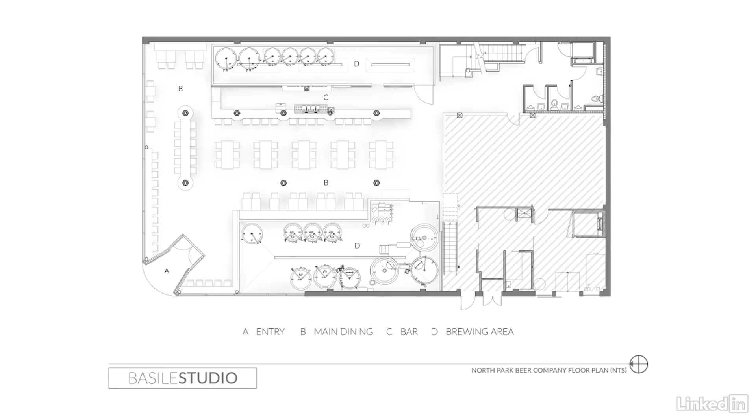Restaurants are extremely complicated because no matter what size they are, they all need the exact same elements. Our whole motto is basically we customize and build as much as we can, and that will give you timeless.

I'm a fourth generation contractor. The need and want to build was always inherent in me. One day I was in a cafe in La Jolla, sitting on some chairs made out of rebar, and I thought it was the coolest thing. So I said, I can get this material for free. I just started making rebar furniture for just about everybody, for every occasion.

I started putting it into stores. Every time I put furniture in, almost 2 or 3 days later, it was gone. When I went in one day to look at the furniture I put in, I noticed how much they'd marked it up. I was immediately like, well, wait a minute. I decided to open my own gallery furniture store. And that's kind of where it started.

People started asking me to do custom work, so I became kind of a fabricator for a lot of interior designers and architects. It got to a point where I got known for that, so designers would just say, if you need something, just cold call Paul and he'll design and build the whole thing for you.

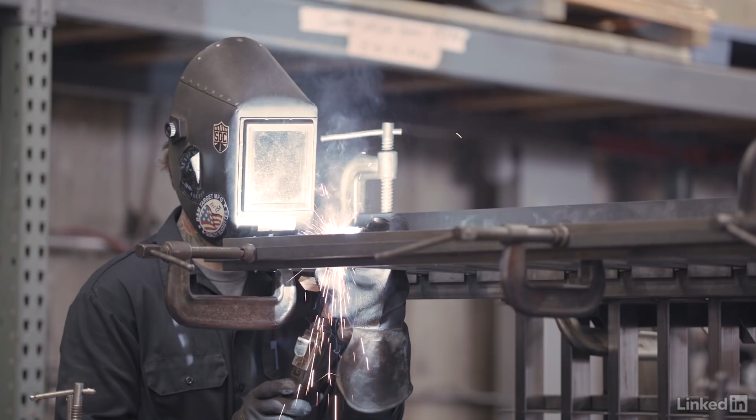BASILE Studio is kind of an incubator for rapid manufacturing or prototyping. My thoughts on how to get something done come from a fabricator's perspective. I just scrapped the traditional way of doing things and basically said, here's the quickest way we can get from A to Z.

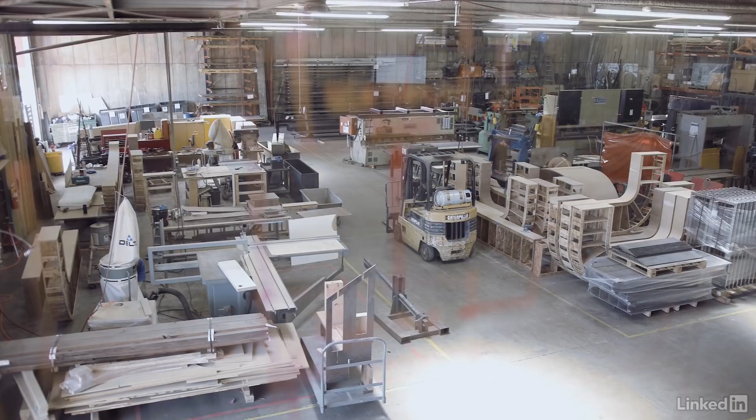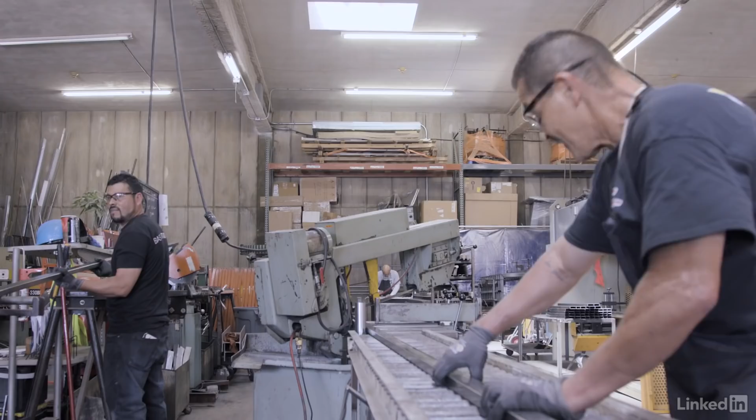Our design studio is integrated into this shop, so what you're seeing above me is a design studio. Typically, you have a designer who comes up with an idea, then sends that idea out to a bunch of different people. Well, we do all of them. We not only do what's traditional in the design role, which is just drawing and coordination, we're involved in fabrication and construction.

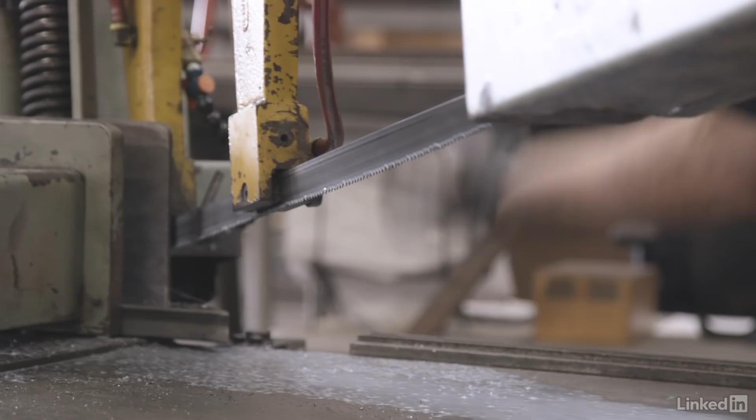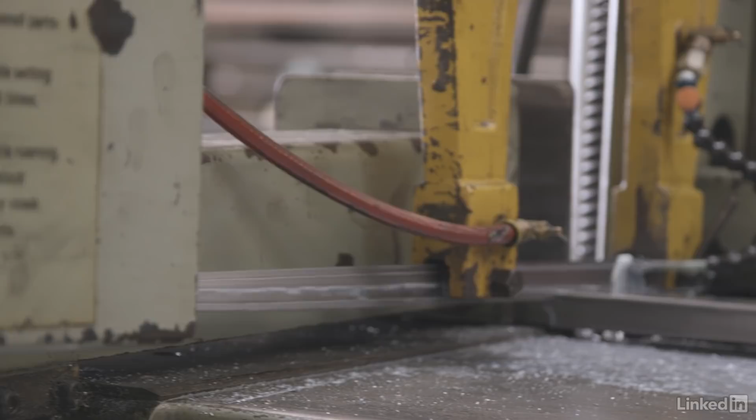Typically, you design something and send it out, and then you don't have to think about it again until it's installed, and you just deal with how it's going to be. The great thing here is now we'll design something and catch the errors right away, or see how it can be improved. It cuts back on all the miscommunicating, and it puts it all together so that anything you can think of can happen, and it can happen fast.

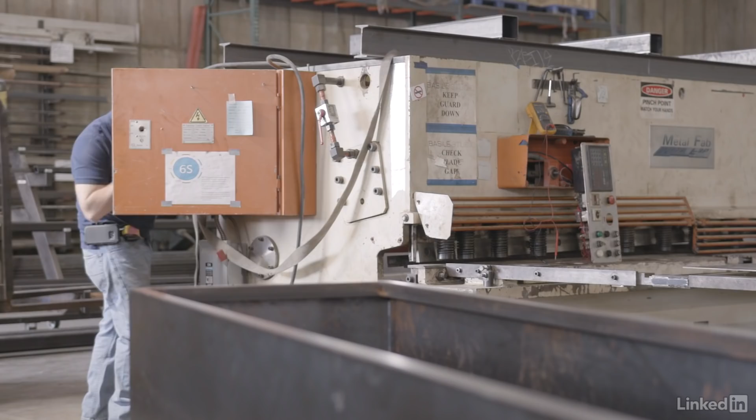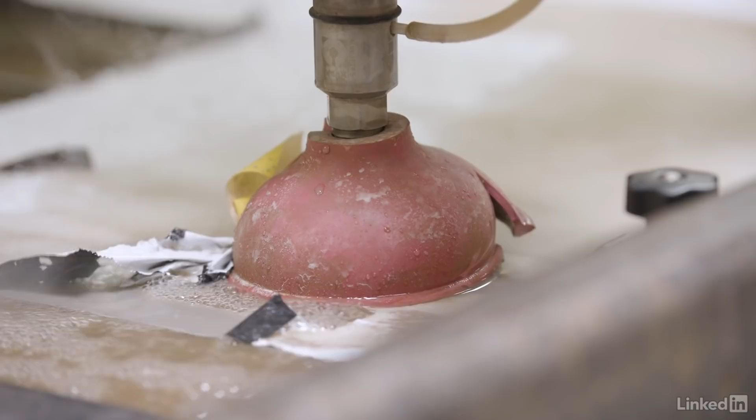What makes our shop really unique is that we have integrated a lot of different tools. The CNC department, which is what we're standing in right now, has integrated laser, CNC wood router, 2 water jets, and CNC plasma. Most of this stuff you would have to go search out and find in other companies, but we brought all those tools into one spot, and that allows us speed.

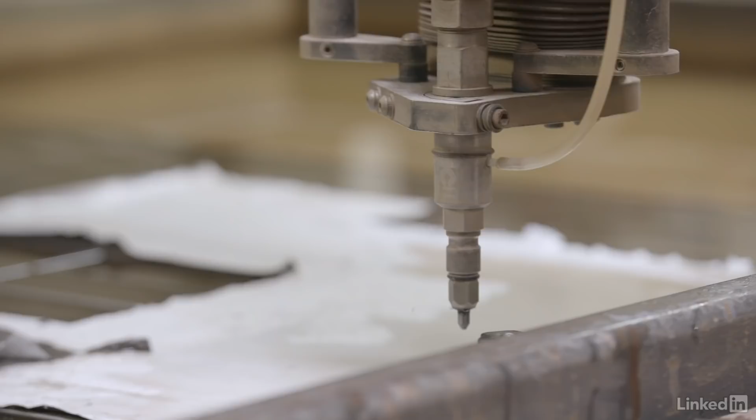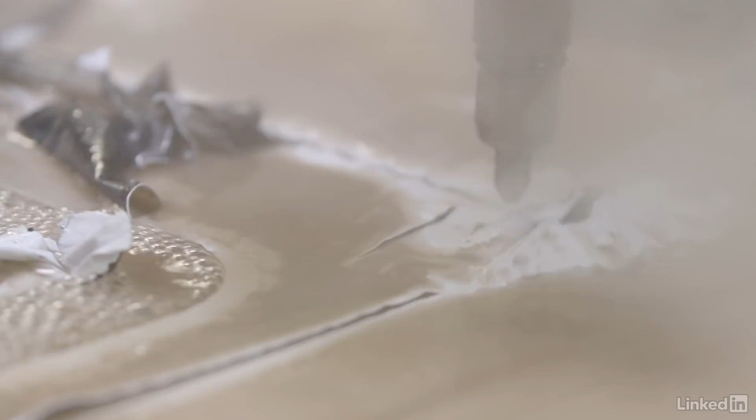A digital fabrication specialist is somebody who can take technology in the fabrication world and use that to produce and make and create. We take 3D models and turn them into the real world to create an environment that creates an emotion.

We use only natural materials. We love metal, not just steel, but brass and stainless steel. And when we want color, we use natural materials like woods. We don't use a lot of paints. It's using mostly natural materials and using them in more interesting ways.

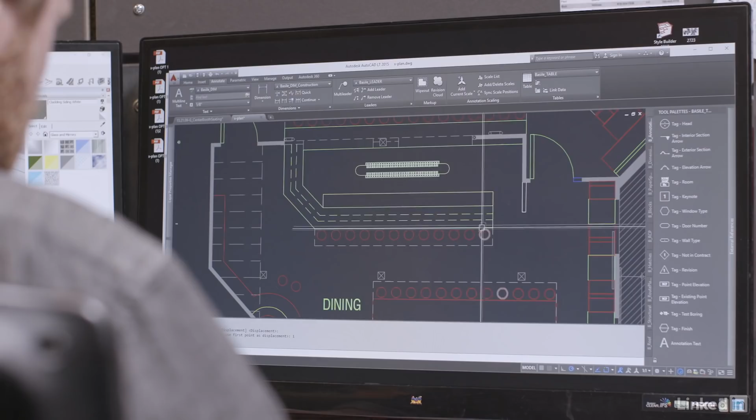First thing we want to do is get the client's budget. We've created a really simple system where we create a floor plan. Once the floor plan is approved, it goes right into modeling the space. Because we're general contractors and we do all the fabrication and procurement, at that point, which is probably 3 weeks to a month into the project, we have a full budget.

In our budgets we include their operational costs, opening costs, food, beverages they're going to need at the beginning, how much labor they'll need for the first month, how much they should have in the bank. We really go through what it's going to take to open this business.

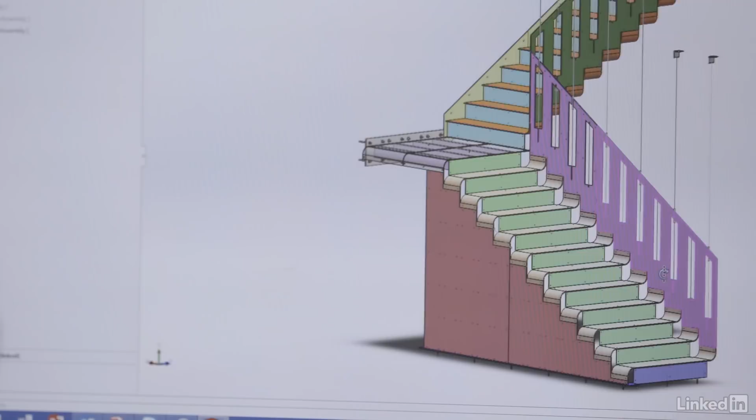After the budget's approved, we literally go back to every single item and redesign. The design process doesn't end until the project's done. That's really what separates BASILE Studio, is that attention to detail.

I think Polite Provisions is a good example. If you look at the back of the bar at Polite, we painfully integrated refrigeration systems so you can't see them.

I worked on the ramen restaurant. The budget was a little bit more strict, so we had to be really creative with the decisions we made. We used a lot of digital tools to create patterns and textures, and really tried to amplify the materials through the manipulation we used, and that way we were able to add a lot of creativity in a budget-driven project.

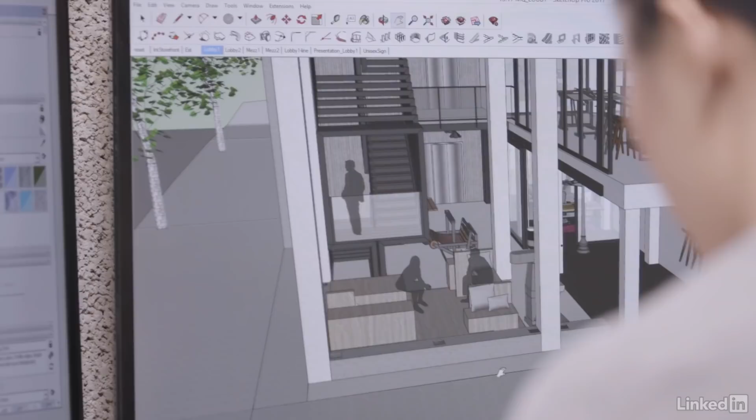Everybody has an extreme passion for what we do. One of our rules is, don't show anything unless you're proud of it. Because they have extreme passion for it, they work very hard to make sure the details come out. You can't really do it otherwise. It's the people that we have.

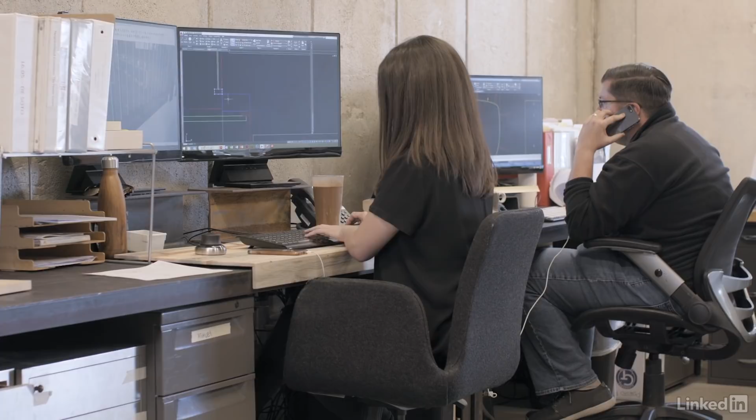There is literally not one day that's the same at this office. I don't think anyone would say they've had the exact same day twice. It just doesn't happen. It makes the design process more fun because I'm not just doing the same thing over and over again. I have to constantly think about the new thing coming.

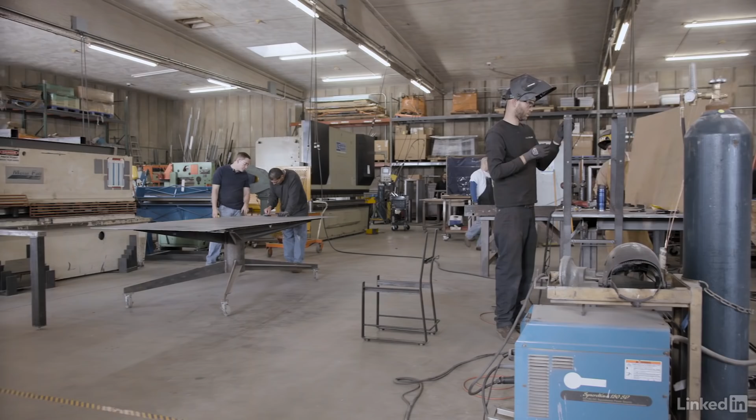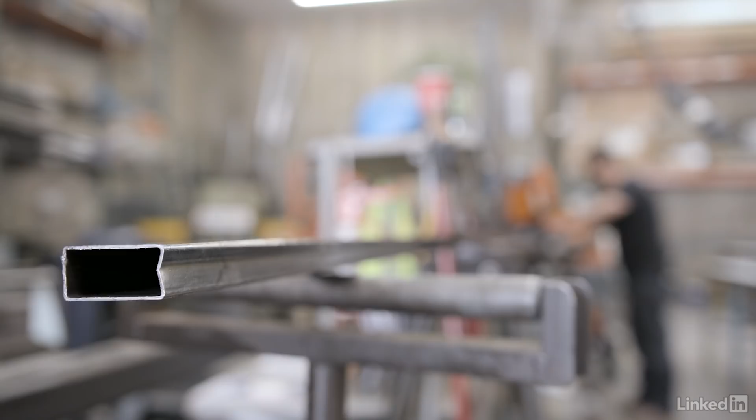In the last 200 years, the field of architecture has really segmented. That's been to the detriment of the profession because no one person really understands the total process of how buildings go together. By participating in every aspect of design from conception to execution, we're able to develop really strong concepts that are executed to a really high level.

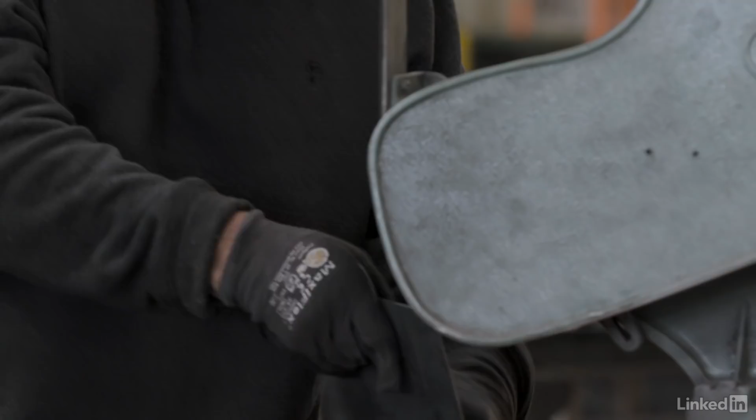I think we're just starting. The future is going to be this rapid prototyping, rapid manufacturing, taking any challenge and seeing how far you can push it. There's no limitation.